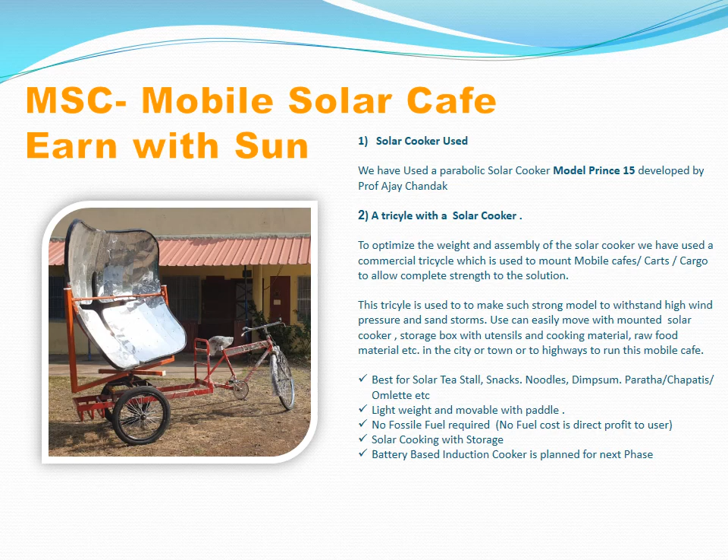The methodology used in this project is that preliminary designs were made with the help of design and drafting software. The different designs of the bicycle, tricycle, and solar cooker were made with the help of the software. And in the fabrication...

By keeping in mind the maximum load the tricycle will be able to withstand, proper edge grinding was done to provide a smoother surface and finishing, and we removed the sharp edges from the design. A ball bearing was placed for easy 360 degree rotation of the cooker on the tricycle. All the fabricated parts were assembled and the cooker was installed on the tricycle stand.

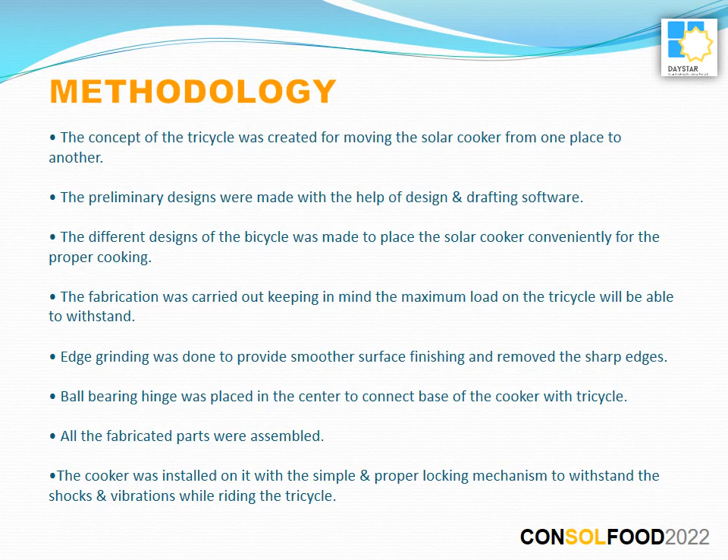My mother has been using the Prince 15 solar cooker for 15 years, and I have also personally been using this Prince 15 cooker for 6 to 7 years. It is a very effective and efficient technology.

So an idea was generated to make it mobile. It was already a proven technology, so I didn't have to worry about the working of the cooker. So I chose this Prince 15 cooker for my preliminary models.

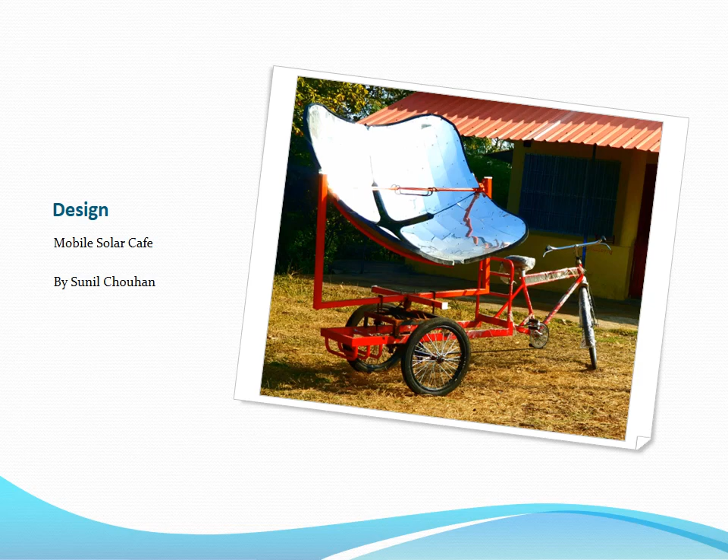The software used in design and drafting for this tricycle mounted project is SolidWorks 2016. I tried different placements and arrangements to check the stability of the cooker with the bicycle. I had to work on its mobility.

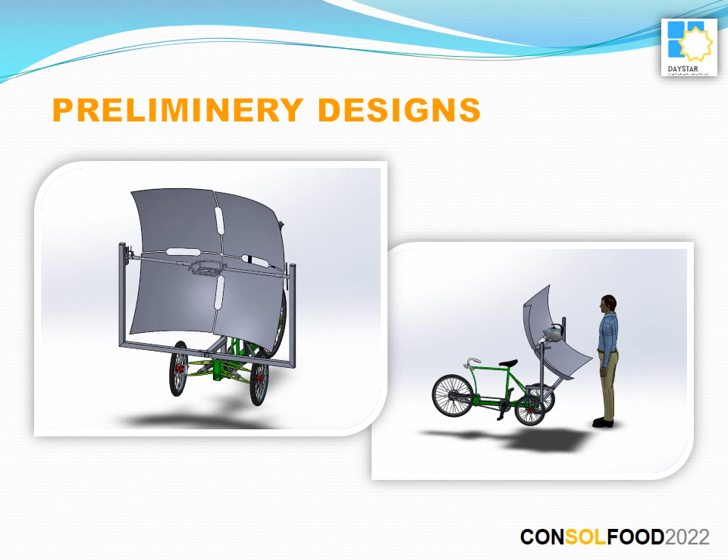So to begin with the idea, over the past few months, the initial phase was to design an idea and also make it practical. I was good with my experience on software, so I decided to make basic designs to combine the solar cooker with the bicycle. The cooker used is Prince 15, designed and developed by Professor Ajay Chandak, which is very effective and stable to use on a daily basis in the house.

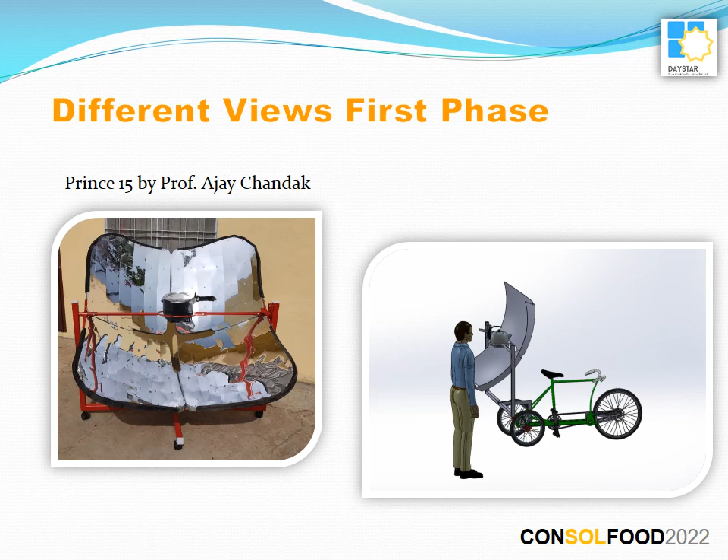The observations made were that the bicycle is unbalanced, and after mounting the solar cooker on it, it became too unbalanced to use on a daily basis.

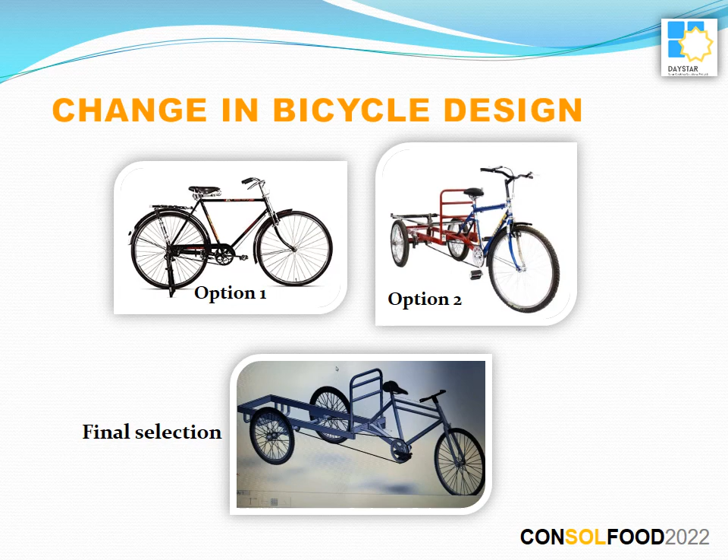So we started working on a tricycle, which is more stable at a time, also under normal conditions and while riding, so that the rider can ride it without any fear. Also the cooker is shock-free from vibrations on an uneven road, and the utensil pots carried along with the cooker are safe enough.

To avoid changing the physical model again and again, the changes were made on the 3D model with the help of software, trying different combinations on the software. The certain problems we faced at the time of design and fabrication were the movability of the solar cooker, its stability, also while riding it along with the cooker, the balancing issues, and the height issues.

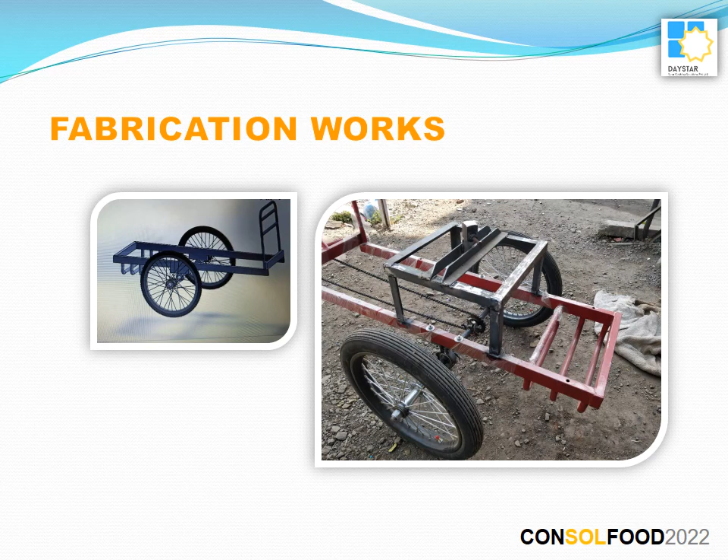For cooking it on a daily basis, the user required an appropriate height for cooking on the pot. So we are working on different calculations and fabrication to make it easier.

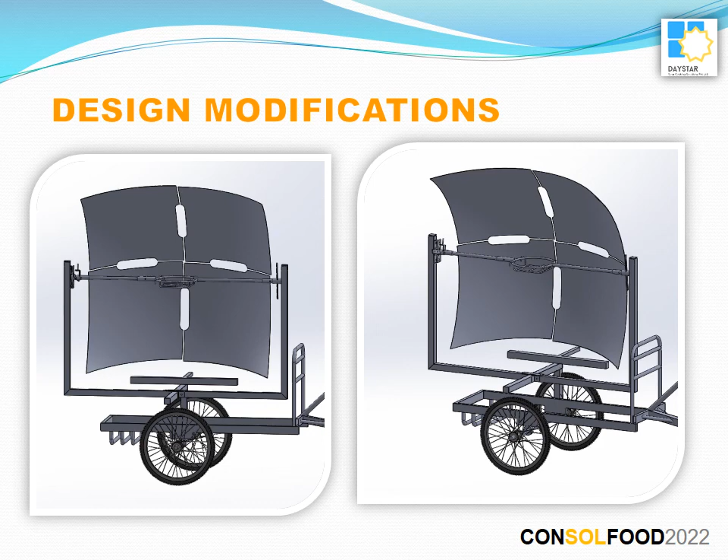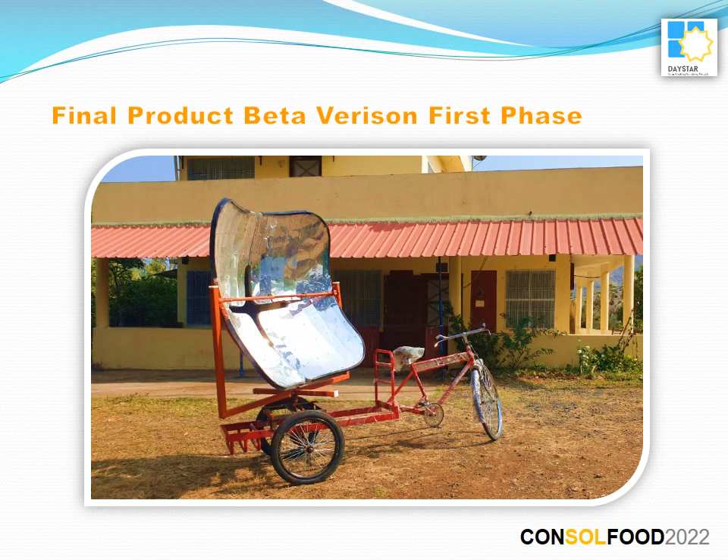So here is our final product, and this is a beta version of the first phase. The second phase product will be ready after a couple of weeks, with modifications and enhancement in design as well as in application. You can see various views of our tricycle solar cooking model.

This is ready now, and we are thoroughly testing it in the field. Some of the major geometrical constraints for a solar tricycle to be effective and efficient include 360-degree movement of the solar cooker on a tricycle and also space for storage, because the tricycle itself is usually quite light and the solar cooker is quite large in structure.

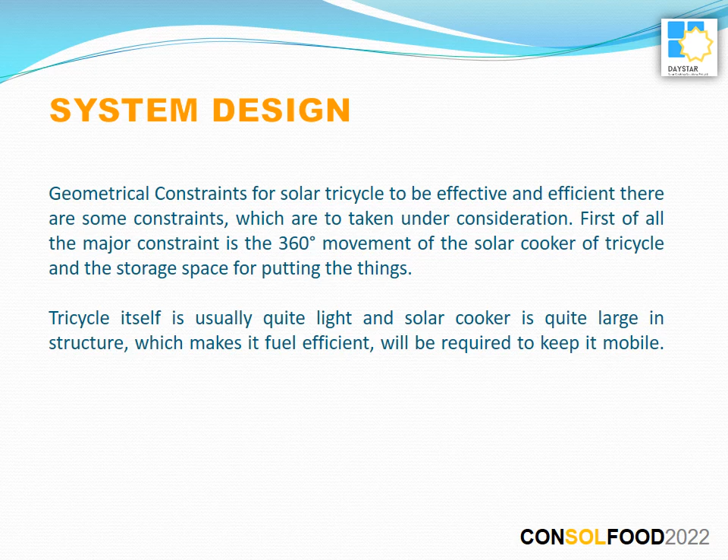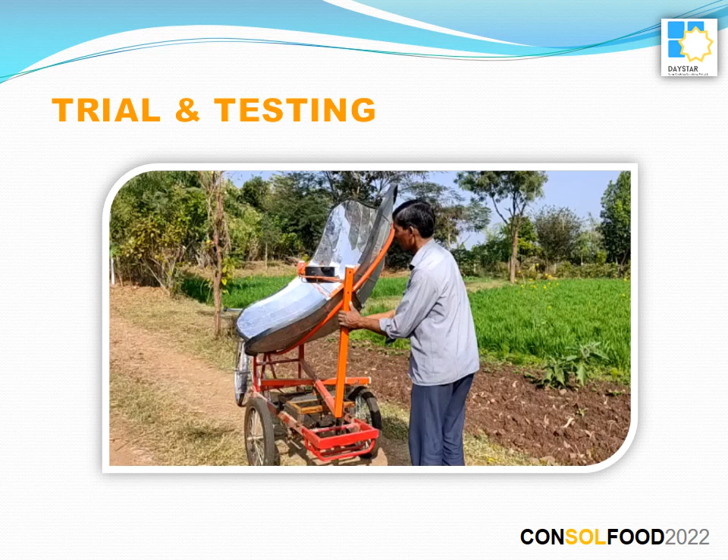Here the user is testing how he can adjust the solar cooker mounted on the tricycle. This tricycle has the capability to set the solar cooker at 360 degrees.

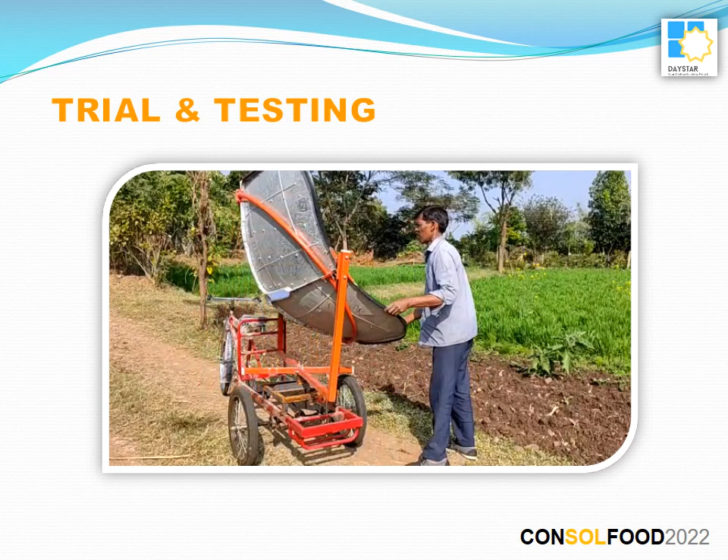We have also done food preparation on this tricycle at various locations. As the solar cooker is already well tested and it's a proven model, Prince 15, we wanted to test whether mobility or transportation affects our cooking timing.

But we found that wherever we had sunlight and the right direction, it was working as good as it was working at a stationary place. So our idea of putting it on a mobile tricycle was quite successful.

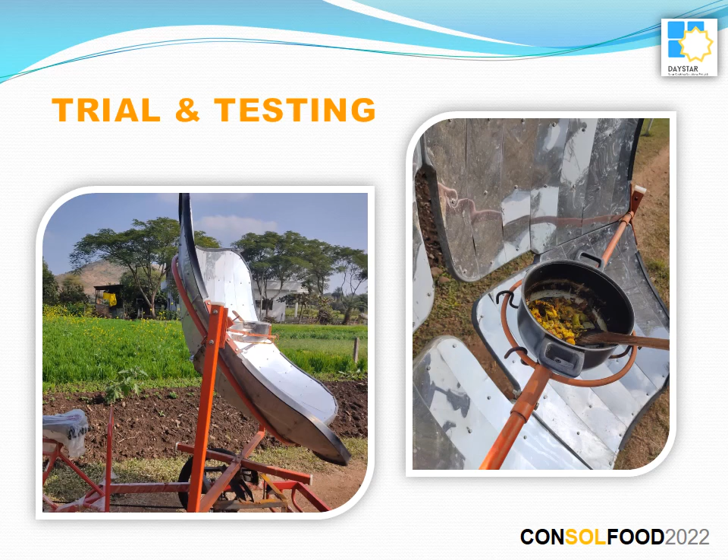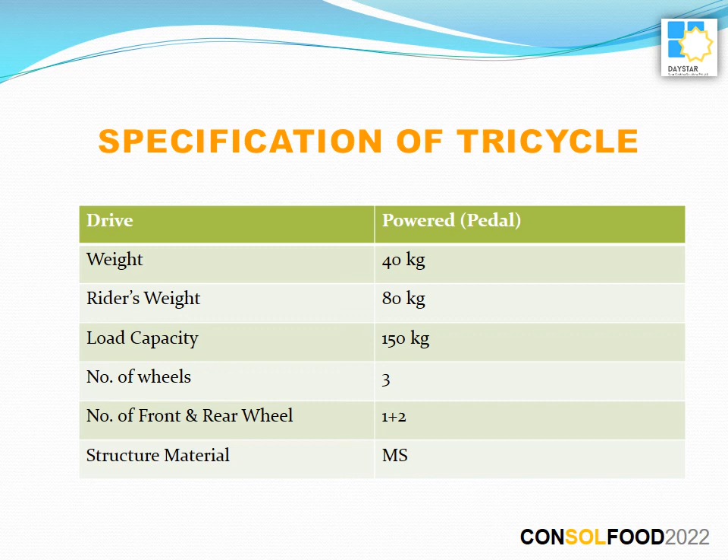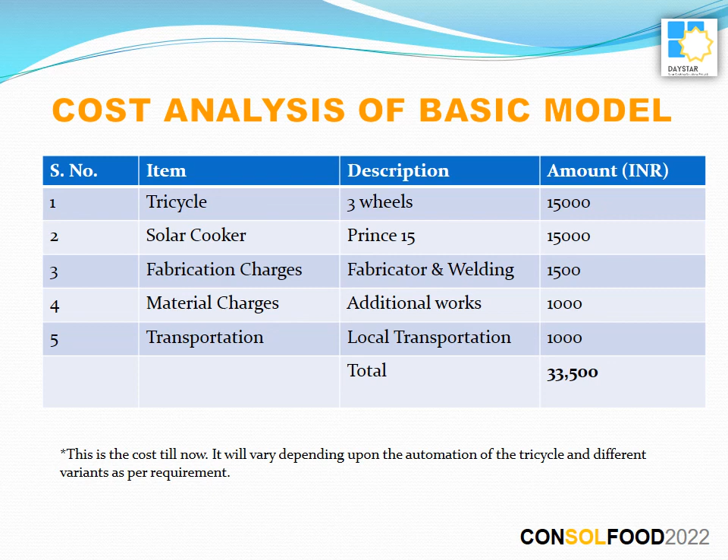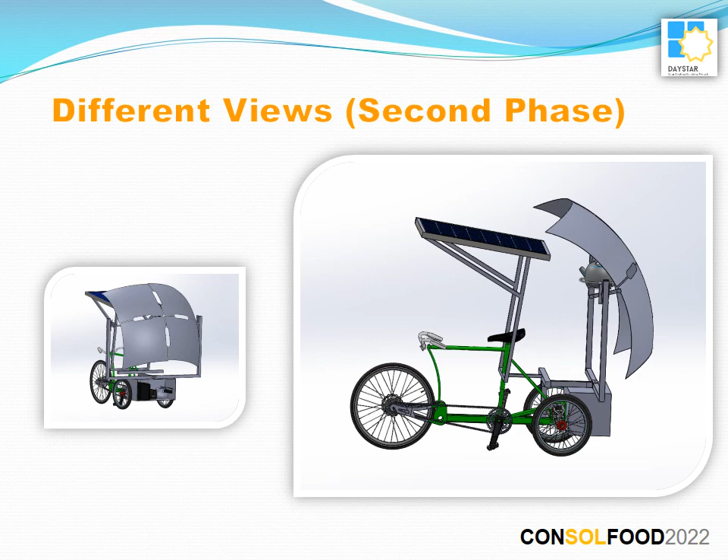Now I am going to show you a few slides which show future designs and modifications planned in terms of IoT, automation, double stoves, and night mode working. Here are some views of the future project, and the design of the final view of our next project.

It will be the first commercial model for a common man to accept a solar cooker in India. It will just double the profit because there is no use of fossil fuel. It is more economic than fuel powered food trucks and cars, and cheaper than buying electrical vehicles for the purpose of solar cooking.

No air pollution, low capital investment, very low maintenance. And we are trying to make it work in night mode also, so we can cook with the help of an induction cooker at night.

The average temperature in summers in India is about 32 to 45 degrees, and the length of the day is also very good for the application of this project.

The applications of this project are as follows. This model can be applied in vending stations, bus stations, universities, schools, and roadside cafes and dhabas.

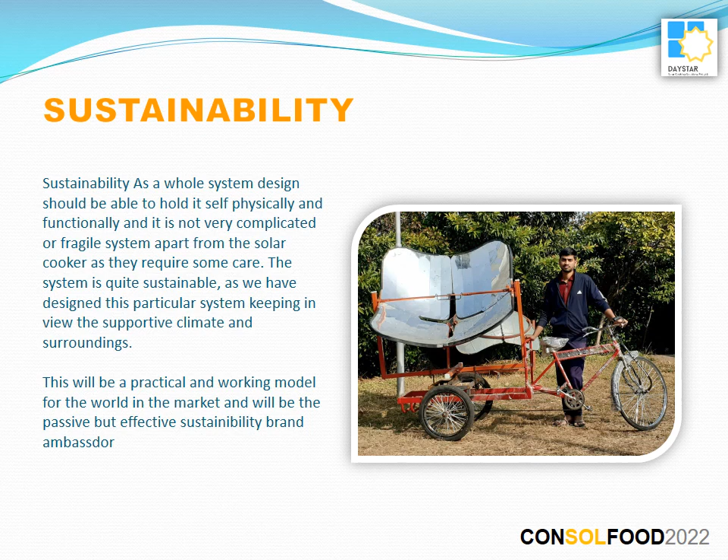Secondly, it will be a practical and working model which will be present in the market itself, and people will see it working. When they see that solar cookers can work very well, they will get inspired to have their own solar cooker as well.

In future, we are trying to expand it by providing automation in the tricycle: a tricycle with solar cooker, a solar powered tricycle with cooker, and a solar powered cooker with induction cooker, so that the user can use it during daytime and also at night time.